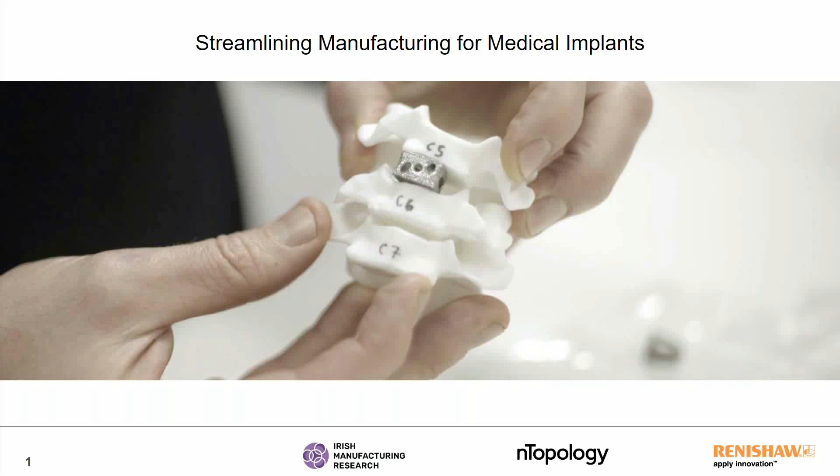We're very excited to be showcasing this case study, this joint venture between IMR, Renishaw, and nTopology. My name is John Graham. I manage the team of application engineers at nTopology, and I've got the pleasure of introducing everyone here to you today. And this is the order in which we're going to be going.

So I'm going to turn things over to Mark Hartnett in just a moment at Irish Manufacturing Research. Our very own Chris Cho at nTopology is going to walk through how this medical device was designed and some of the breakthrough technologies in nTopology. And then finally, Chris Demery at Renishaw will give you an overview of some of the printing capabilities and how they turn this design into a reality.

Now, one thing to mention before I turn this over to Mark is that this is really a technology demonstrator that we're showing you today. Most of you, if not all of you, understand additive manufacturing is really changing the landscape of how things are not just manufactured, but the approach to design. A lot of breakthrough technologies are coming out on the scene.

All three of our companies are at the forefront of exploring how can we take something like additive and push the bounds, not just in the way things are manufactured, but the way we think about design and where these designs can be used, even something as wild as in the human body. So that's what we're talking about today. So this actual design hasn't been put in a body quite yet, but this is really a demonstrator of the capabilities that I believe are soon going to be coming down the road, and some of them may have already been there.

So I want to turn things over to Mark Hartnett now of Irish Manufacturing Research, and he'll walk through what this design was all about and what led them to try to push the bounds and use something like additive manufacturing. Mark, go ahead and take it away. That's brilliant. Thanks for that, John. Chris, if you can just jump to the next slide, lovely.

So what additive allows us to do, we have the same ideal design that exists there, but by using the new tools, the advanced skill sets, and retraining our designers, we're able to design and develop a product that's much closer to that of the ideal design.

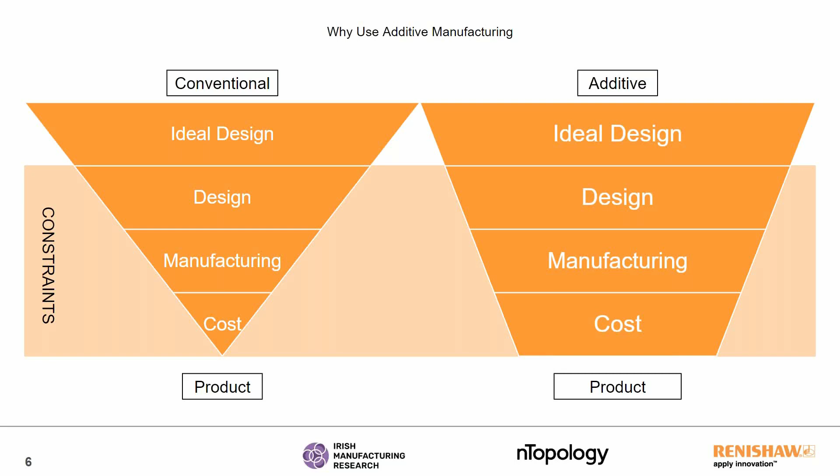The manufacturing limitations that are placed on that by additive manufacturing are much less than those that exist from a traditional manufacturing process. And finally, the cost limitations that come with additive manufacturing are much less constraining. You're able to do a lot more with your process for the same cost compared to a traditional manufacturing process. And this is where that adage of complexity is free comes from.

So when we're designing our product, our first goal is to produce our design envelope. We need to do that for both the process and for our product. So if we look at our process design, we start with a key user requirement. We get that through our voice of customer analysis. So the first one is obviously the product has to be designed well for the process which is producing it. So we come up with a number of design solutions which allow us to hit this.

So if we take, for example, minimizing the post-processing requirements, there are a number of ways that we can minimize the amount of post-processing we need to do to a product. If we understand what the effect of self-supporting geometry is, the effect of the overhang angle on surface finish, and how we can get away with producing a part without any support geometry, we can produce a much better component with a lot less additional work at the end. So if you take, for example, by producing it with a bullet nose tip, we're able to build it straight onto the build plate, allowing us to produce a part with no support removal.

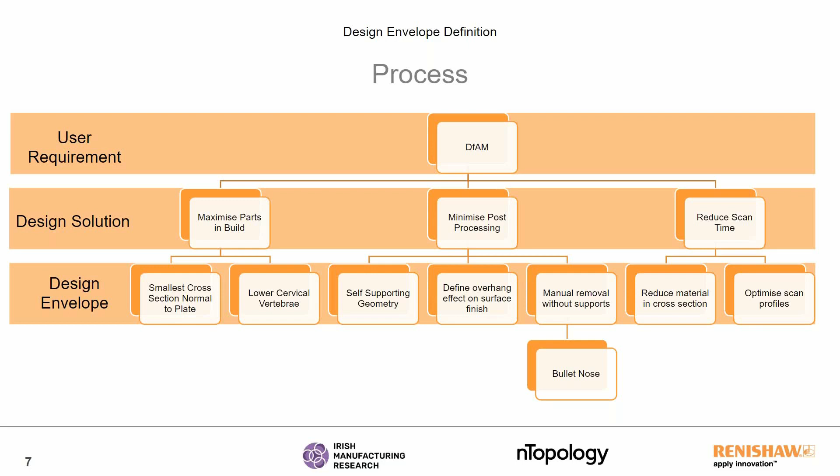So then we start to come to our product window. And this is where it begins to get really interesting, because our key user requirements are what are going to affect the customer at the end of the day, not what's going to affect us internally. So if we take, for example, improving subsidence management. Subsidence is when the implant itself moves into the bone, gets reabsorbed into the body, and actually starts to present the same and worse symptoms that you're trying to treat in the first place.

So we can improve that through a few ways. We can reduce the stiffness of the device, and we can do that by applying porous structures or other compliant features into the bone. And one of our goals there can be to match the stiffness of the bone which we're going to be in contact with. And we come up with a methodology for measuring whether or not we match that stiffness. So we look at test methods such as ISO 13314 or other ASTM standards, which are very similar as well.

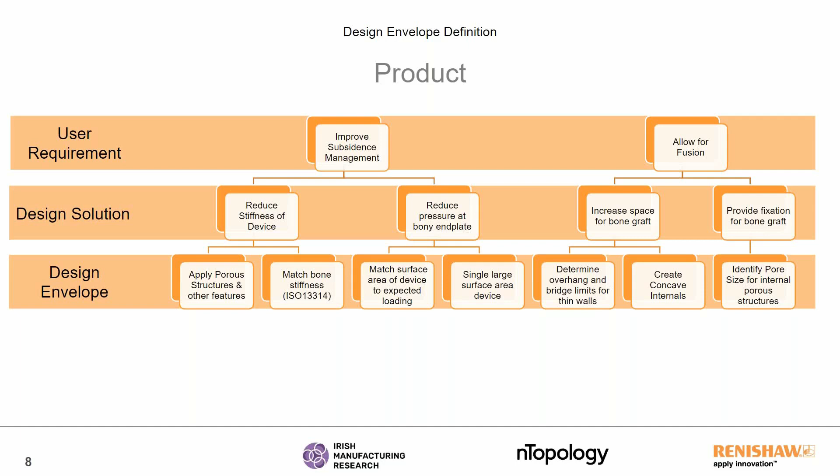Over to the other side, obviously the classic one that everyone hears about is improving osseointegration from porous structures. So we can look at providing good fixation for a bone graft, and we need to do that by identifying the correct pore size that's needed for the internal porous structures. And what's interesting about this is once we start to do this, we start to move into requiring very fine strut sizes, which requires us to refine our laser parameters, which shows that close link between our product development cycle and our process development and our process optimization.

So once we have our design envelopes defined, we can start to actually get into the fun of developing the product which meets those. So you can see here that we've got multiple geometries for our porous structures. And what we're trying to do with these is with two key requirements. One is to control the mechanical compliance, which is defined by the equations you see in the middle, relating the density of the porous structure to the mechanical properties. And the other is to specify the specific pore size to optimize for osseointegration.

And what this allows us to do, once we're able to define our key requirements in a mathematical form, we start creating this link between the required product performance and the physical shape of our final product. We can feed these equations into parametric softwares and really speed up that iterative design process. And you can see here some of the key cell geometries that we've gone forward with for our development.

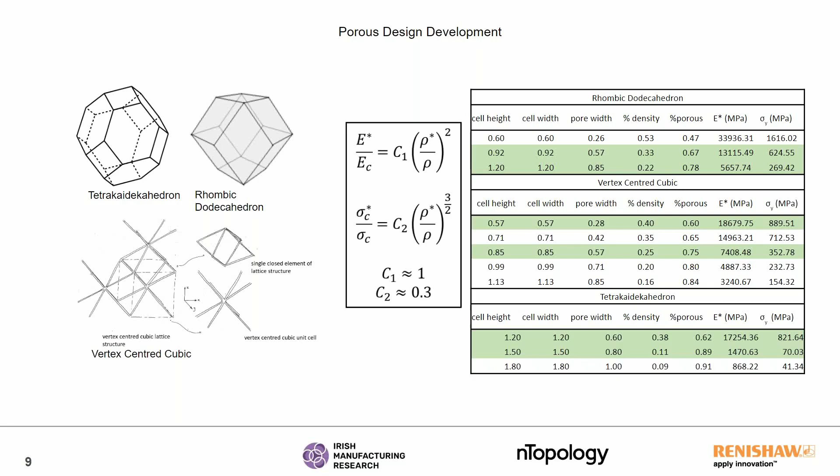And we also have large internal voids which are concave in shape. The concave shape allows us to produce these with no supports, and it also maximizes the space that we can pack bone graft inside. Also, they're all sharing this bullet nose tip, which I mentioned earlier, to allow them to build straight onto the build plate.

When we look at the lattice structures, we have two main functions of the lattice structure. We've got features on the top and the bottom surface of the part, and these are to promote osseointegration. We want to get that bone to grow into us as quickly as possible, and we've specified the optimal pore size for that, between 0.2 for wicking of osteoblasts and 0.9 for full bone ingrowth.

And then finally in the middle, we've got a mechanism for allowing compliance, be that through a large-scale feature or the lattice structure. And an important one here is we want to use a stochastic structure, a random structure in the middle, to minimize any potential shear planes which could exist throughout the entire structure.

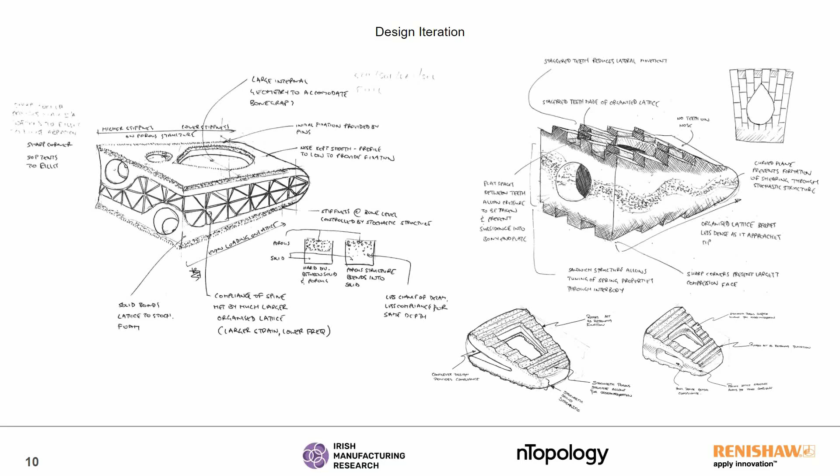So now that we have some final concepts, we're able to develop these out in our traditional CAD softwares. You can see some of our final concepts here. Again, sharing quite a few similar methods. We've got porous features on the top and bottom, stochastic features in the middle to allow for that compliance. We've also got the inclusion of pedicle screws on the left-hand side to allow for that initial fixation, and then teeth and rib features on the right-hand side to do the same.

On the left-hand side, if you take a look at the large-scale voids which are inside, you can see a sort of chapel roof style design to them. And what this allows us to do is it means we can achieve the same functional void and gap within our device. However, we're able to produce it completely self-supportingly. This overhang feature, along with the bullet nose tip, we're able to quickly develop using on-machine testing to find out the effect of contact patch and surface overhang angle on the surface finish.

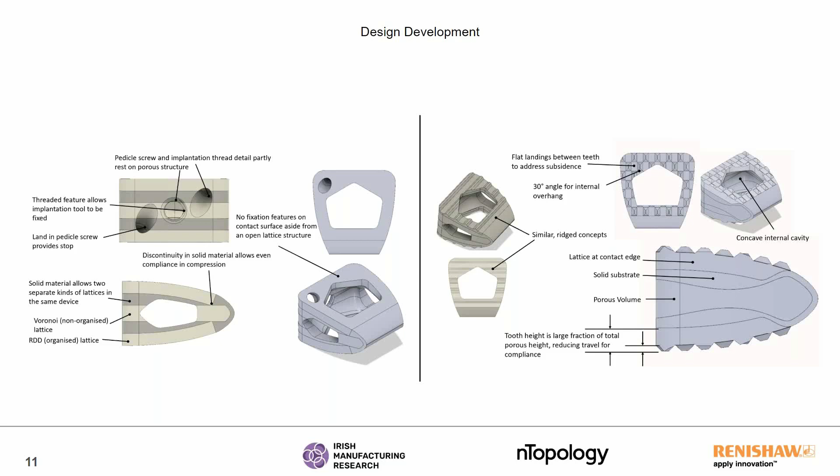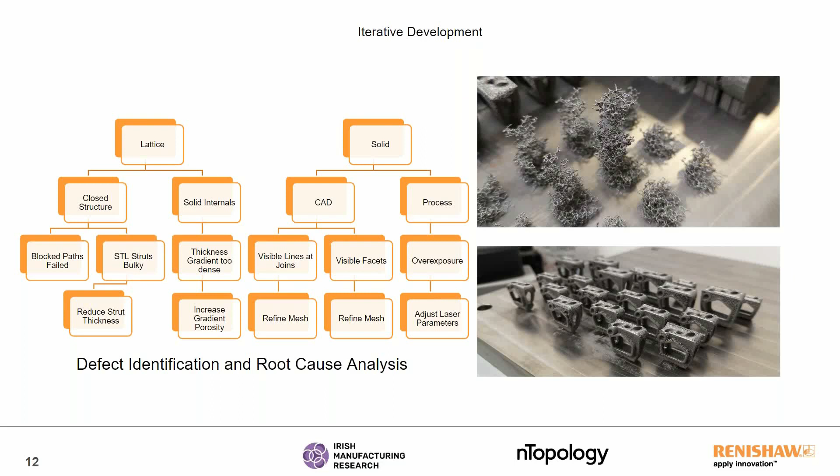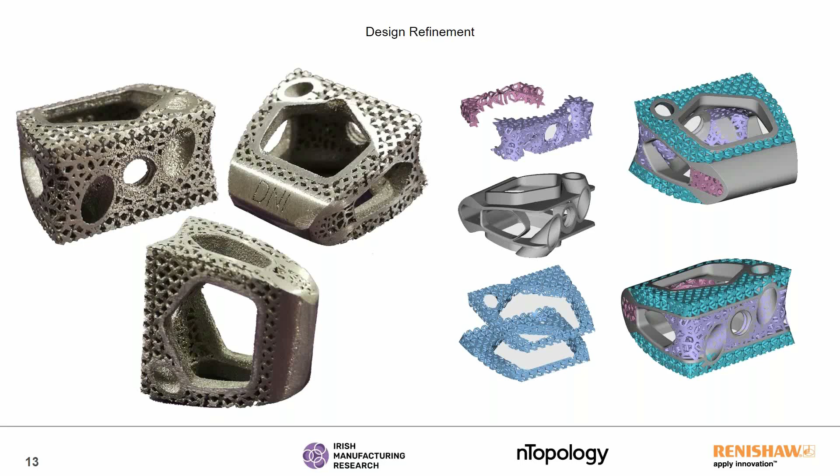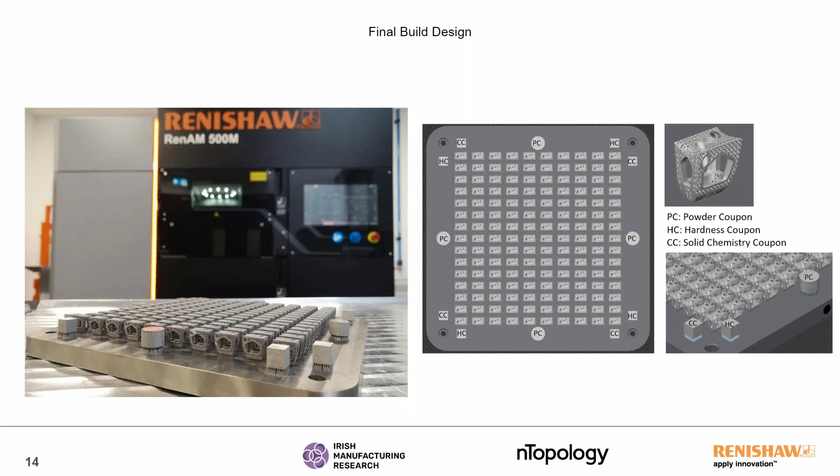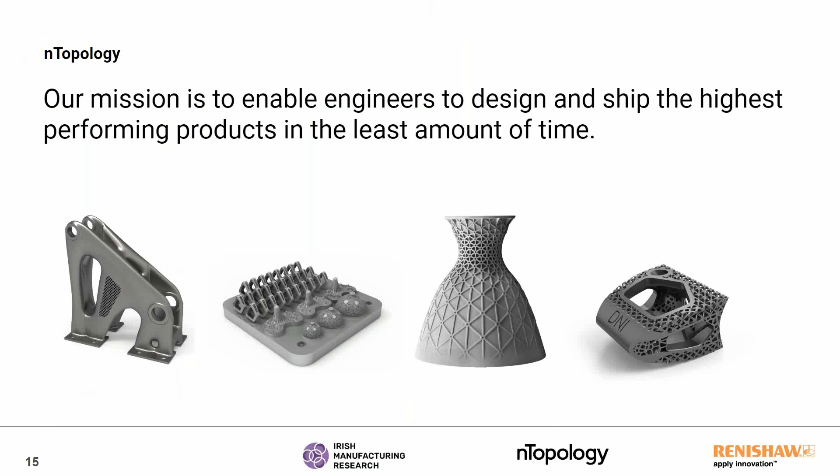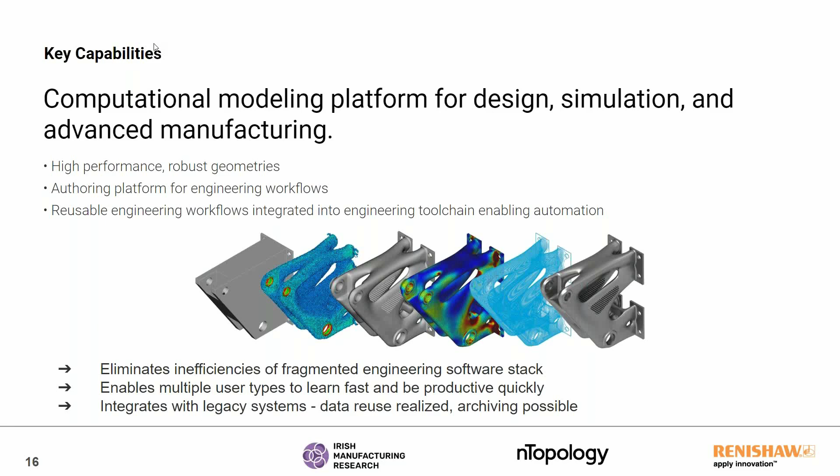Thanks, Mark. nTopology's mission is to enable engineers to design and ship high-performing parts in as little time as possible. With the computational modeling platform that is the nTop platform software, users are able to leverage its capabilities for design, simulation, and advanced manufacturing. Through the use of robust and reusable workflows, engineers can enable advanced and high-performance geometries in an approach that unifies design, simulation, and manufacturing together. By integrating these workflows into their engineering toolchain, users will find that they can automate processes, eliminate software inefficiencies, and be more productive, while still maintaining integration with their legacy systems.

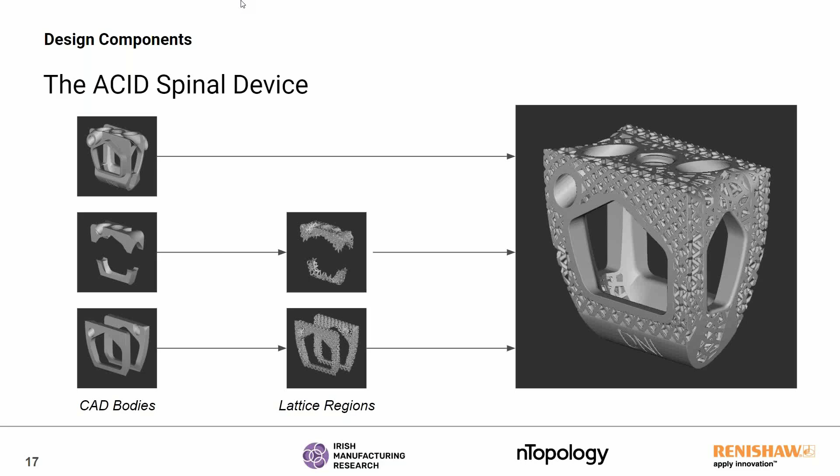The design approach of the ACID spinal device is very much a volume-based approach. Now, using the solid bodies provided in their 3D model, the designers over at IMR were able to assign certain bodies as solid regions and others as design regions to be populated with a lattice. By recognizing the regions as separate entities, the designers can be sure that they are working exclusively within their net shape and combining them at a later time only when they are ready to do so.

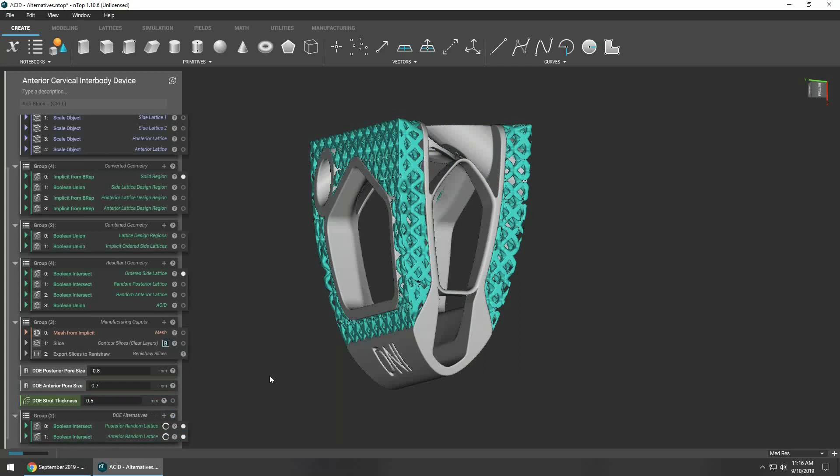One of the benefits of using the nTop platform software is the ability to quickly and effectively sweep through parameter sets just to see how the geometry will respond to these inputs. From there, the designer is empowered with real-time feedback to make the best engineering decisions. To showcase some of this feedback, I can jump into the software and sweep through a few values for the pore size of these randomized lattices. In only a few seconds, I'm able to immediately assess what those inputs will yield and continue in the right direction from there.

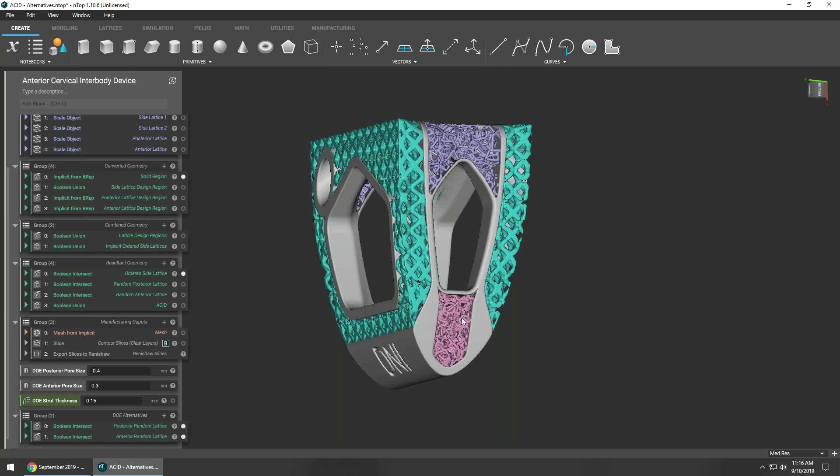A key value of nTop platform is also being able to easily reuse these workflows regardless of any changes in geometry. In the case of the ACID spinal implant, even if the input geometry set is slightly wider or slightly longer, the workflows are robust enough to compensate for these variations and continue to execute as intended. This alone has significant implications for spinal devices, which can have part families ranging from 20 parts to over 100.

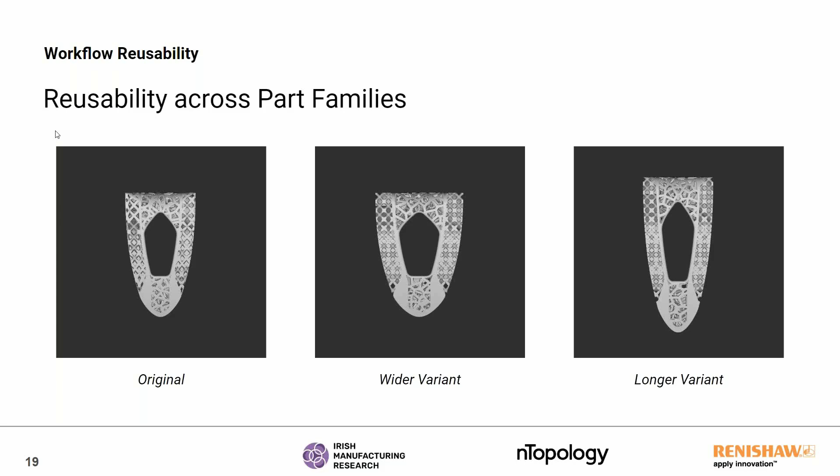Being able to design a single robust workflow and reusing it over and over again has the potential of eliminating an exorbitant amount of repeated work when compared to a design process that needs to be tailored to each and every single implant. What is also recognizably important to these design workflows is their repeatability and controllability.

Any workflow that is created in the nTop platform software is not only PLM compatible, but also highly shareable. During the development of these workflows, only the variables that are relevant to the design exploration are modifiable. The rest of the knobs and dials that can introduce variability into that workflow are locked away so that mistakes can't be made and the risk is greatly reduced. This enables a single workflow to perpetuate within a team or far within an organization while still adhering to the initial design intent.

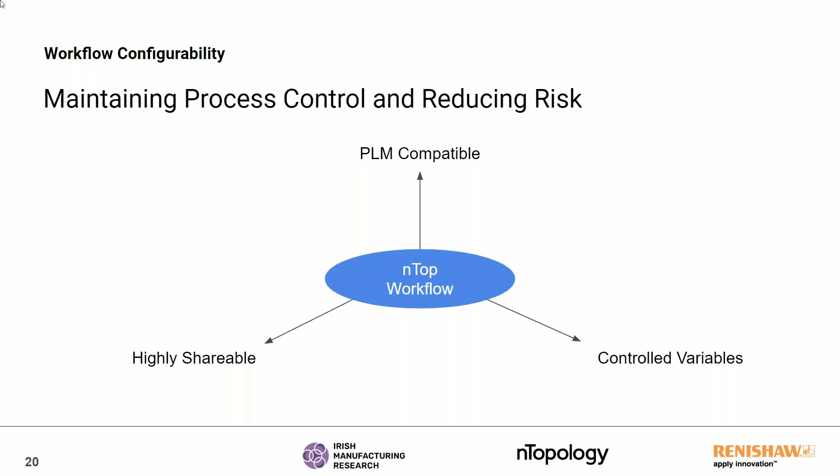Finally, nTop platform allows your geometry to leave the screen and become a physical product through one of two ways. The first is your classic mesh output, such as an STL format. These files are universally recognized, but can be a bit heavy when it comes to the file size, especially for lattice-based designs. However, we can take things a step further and bypass these heavy STL files by slicing the part

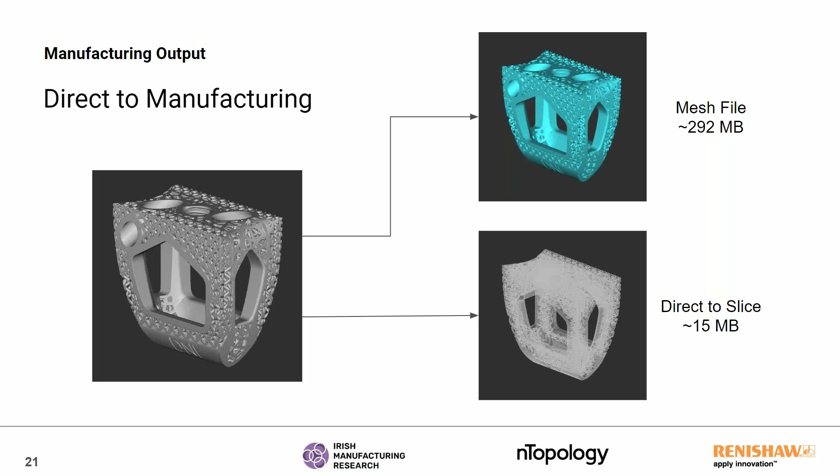directly within nTop platform. By working directly with Renishaw, we've ensured that the contours and slices that we generated in the software can be directly read by Renishaw software, eliminating the pain points that come along with working through these traditional meshes. Now, I'd like to introduce Chris Dimmery from Renishaw to discuss the hardware involved in making the ACID device possible.

Thank you, Chris. So this is Chris Dimmery from Renishaw Medical Dental Division. I'd like to give you an overview in terms of the features that are available on the Renishaw platforms and how they're relating to what Mark's doing at the IMR in terms of development for medical devices. Some of these features are going to span across R&D, also production of the devices. So if we could go to the first slide, please, Chris.

Right, so Renishaw is producing our own software packages. So we've got a material editor. When Mark had touched upon the design of experiments that he was carrying out, he was very interested in having an open software source that was able to give him flexibility in terms of developing his devices and not constraining him at all. So Renishaw provides that solution here.

There's over 150 configurable process parameters, and also one key thing is the laser is able to be used in continuous or modulated waves. What that delivers to you is the ability to actually melt metal at a very quick rate for, say, the very dense areas of the geometry, and then also use the modulated wave when you're looking at the fine lattice. So again, you've got complete open, flexible development parameters. If you go to the next slide, please, Chris.

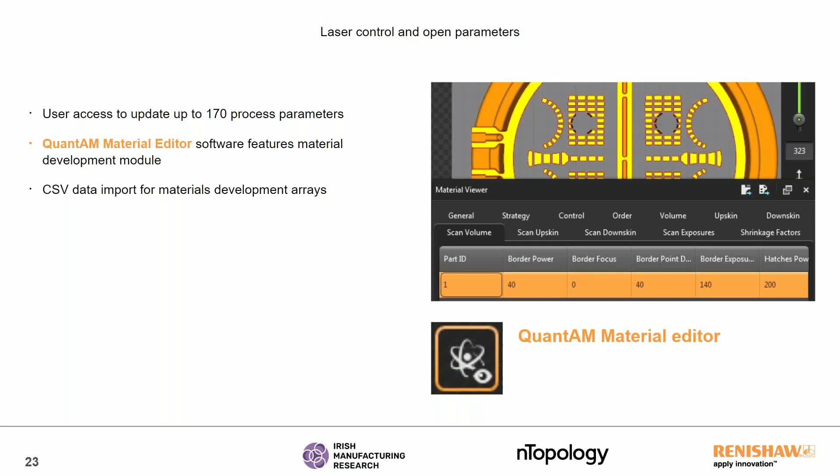The QuantAM build preparation software, again, developed in-house, so future developments, which is really important in this sector at the moment because everything's moving so quickly, are going to be delivered through to you as a user. Very easy to use, and again, gives you that wide flexibility. If you go to the next slide, please, Chris.

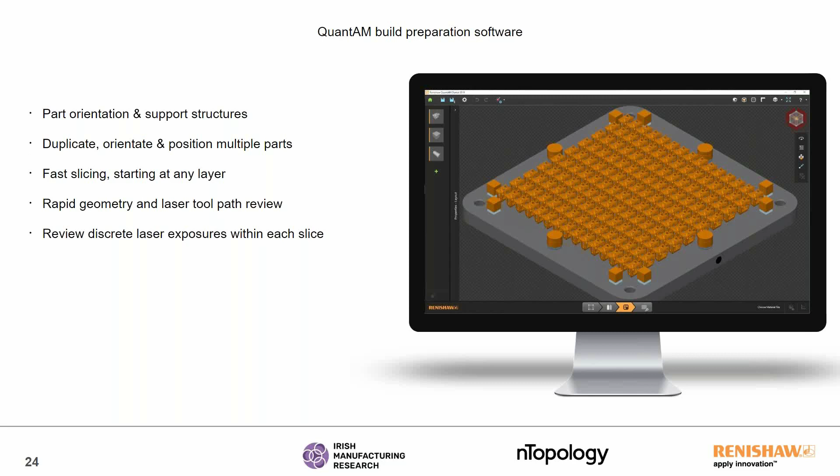So the 500Q machine is the latest machine available from Renishaw, and that was mentioned on a couple of occasions by Mark. An approximate build rate was about 8 hours for the plate of spinal cages that we were looking at earlier. The key point, 4 lasers are available within this machine platform, which is typically the size of a single laser machine. So you've got commercial and operational benefits there, features that are unique to Renishaw, but then also technically there's been lots of improvements within this system as well. If we go to the next slide, please, Chris.

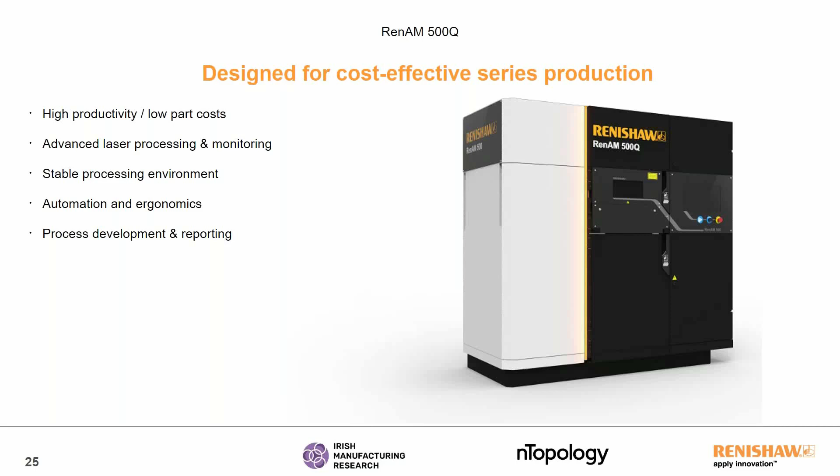Just looking in at the lasers and their configuration, how they operate typically in the marketplace at the moment is you have one configuration here on the left-hand side, which is a dual laser machine, and each laser is looking at approximately 55% of the bed each with an overlap region shown in the middle. Over on the right-hand side, you've got a four laser machine which can overlap also and has a gas flow which is downwards from the top of the machine and out to each of the corners.

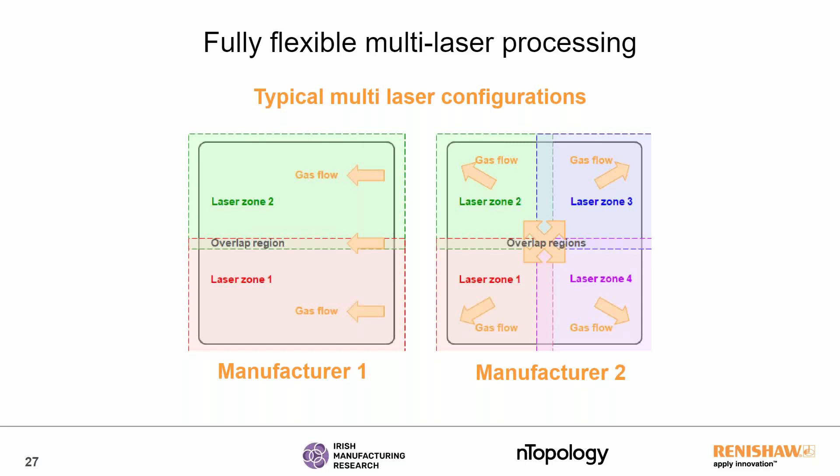The Renishaw system has the ability for each laser to go to the full extremities of the plate. So you again have open control and flexibility to program the lasers to fire at any part with any parameters you choose to do within your device and manufacture process. So that eliminates the overlap regions. So that again gives you more flexibility, and potentially with some devices would mean that you can produce quicker.